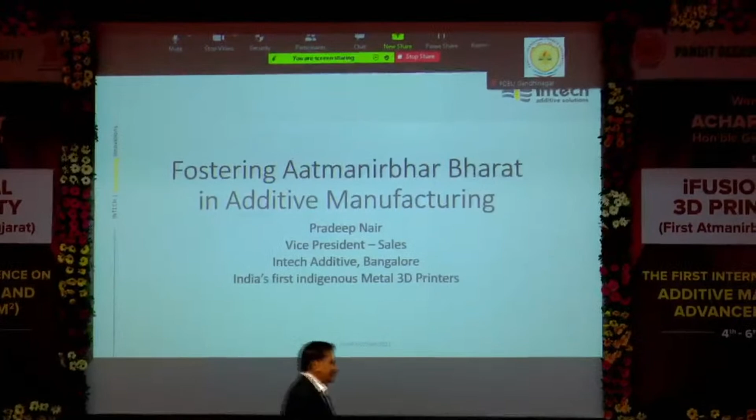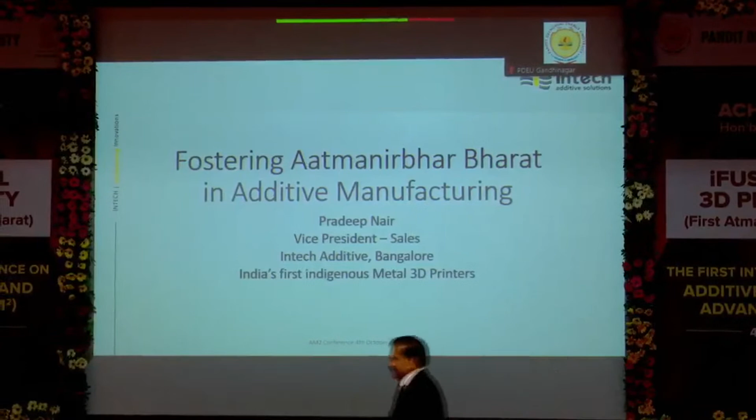Good afternoon, and welcome to the post-lunch session. Normally this session is what we call the graveyard shift for speakers. You know, after a good lunch, all these look like comfortable beds. So it's my job to try and keep you engaged, and I hope you find this talk interesting. My name is Pradeep Nair, and thanks for the introduction.

Yes, I've been with additive manufacturing for a long time. Initially, it started as a technology that managed thermoplastic materials, and progressively it moved to metals. I spent most of my additive life working for an American company, Stratasys, and then moved to a German company called SLM. More recently, for the last 18 months, being with an Indian company that has designed, developed, and is manufacturing an India-made metal 3D printer has been a revelation for me.

Actually, I was listening to Dr. Satish Reddy, who was pushing Indian industries to make powders and the printers themselves in India. I wish he was here, because I would have told him it's already happening. So it's not in the future, it's right here.

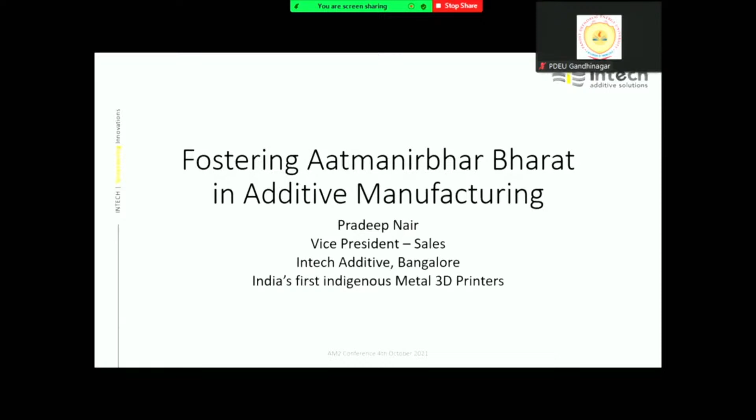I don't want to spend too much time. By the way, I wasn't given too much time by Dr. Sarkar. I think because Navratri is around the corner, he gave me a 50% discount and asked me to reduce my speech by 50%. So off went a lot of slides. So I'm going to skip parts of my presentation, which I'm sure many of you are already aware of or can easily find on the net.

So one of them, for example, why do you need metal AM? Speaker after speaker in the morning told you the importance of metal additive manufacturing. But in a nutshell, it offers unparalleled design freedom compared to machining, which we call subtractive manufacturing. If you can design it, you can print it. Dr. Jha said the very same words. In other words, you don't design for manufacturability, you manufacture for design. That is a key issue with additive.

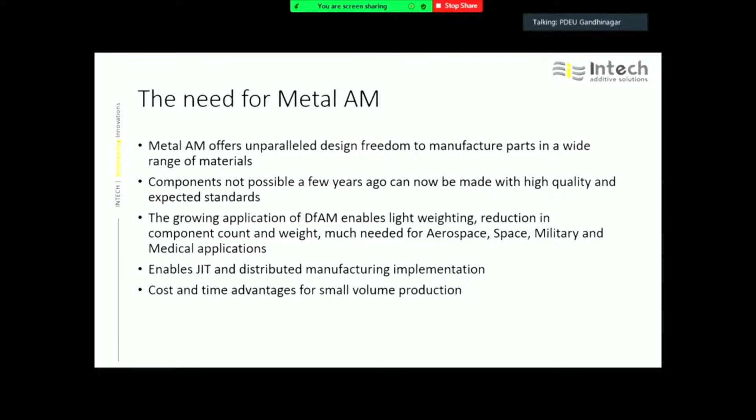Also, the range of materials is increasing. Way back in 2000, when the first machine showed up, you had only an almost primitive steel material. But since then we've progressed a lot. And because of the design freedom, components you could not make some time back are now manufacturable, which means a relatively new subject, DfAM. You all used to design for manufacturing. Now it's design for additive manufacturing, which means right at the concept level you're designing without the constraints of machining. You need to think differently.

So going back to point number 2, components not possible. We have a problem again. Yeah. Now it's the laser pointer's turn not to work.

All right. So since components that were not possible some time back are possible now, you can think differently. That's what DfAM allows you to do. And because additive addresses low volume production, it's not really a technology for millions of components, but when you have low volume and high complexity, additive is fantastic. Which means you can keep digital libraries now instead of keeping thousands and thousands of parts.

I was talking to HAL. One division of HAL has 90,000 parts in spare, and they keep these for decades. They have whole buildings full of spares which may not be used for 20 years, but in the 21st year that spare is required, they have to pull it out. That's a lot of space, time, and money. Now the idea is veering towards, why keep all that? Let's just digitize it and print as and when required. That's spares production on demand.

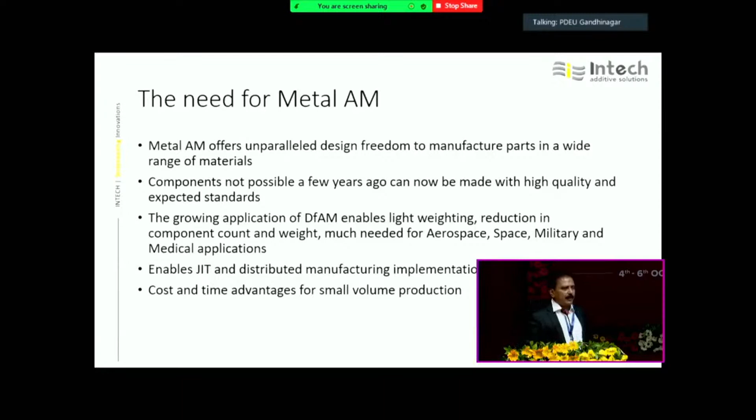And of course, for small volume, the cost and time advantages additive can bring in are huge. So I won't go too much into that, or the application side. I'm sure you can Google a lot of that, because I really want to talk about a subject that was pervading from the morning, Aatmanirbhar Bharat in additive.

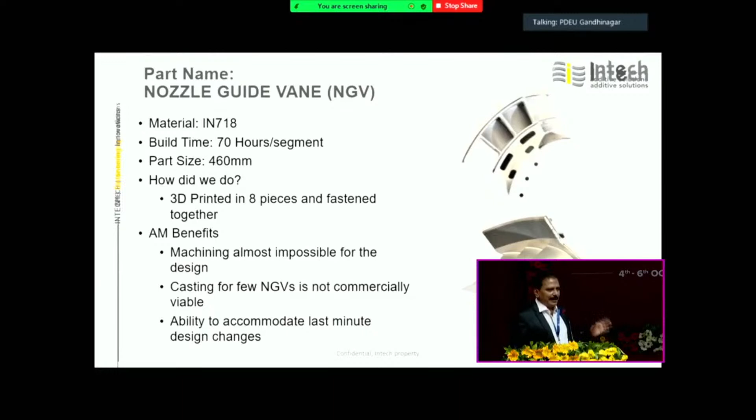Just a few rough examples. This component, as you can see, is virtually unmachinable. No way you can produce that with conventional manufacturing techniques. But since the part was so huge, we couldn't build it in a single print, so we did it in segments. We printed 8 pieces and then fastened them together. The benefit is that this part is not possible to be machined.

And then the requirement, at your early stage of design, you want to test these parts, and you need just a few. So how are you going to tool up or machine just for 3 or 4 of these? Metal additive is a perfect solution for that. And with any design changes, if you're tooled up, your tool is gone - that's probably a few lakhs, thousand, worth of tool just thrown away.

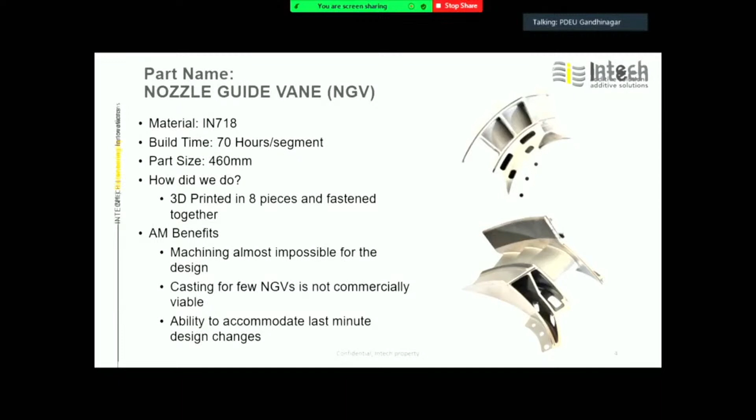What you want to think about when you see this part is that it is all done in a single machine. If you were to subtractively machine this component, how many machines would you need? A whole array of machines, a whole array of processes, a whole array of different skills required to manufacture this component. And that's going to take weeks and weeks of manufacturing.

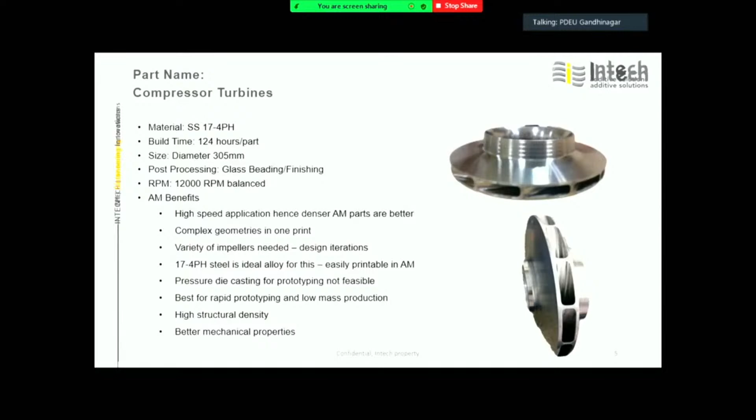Whereas we just print this out in 124 hours, glass bead it, and you almost get this kind of finish - not right out of the machine, but after post-processing. And this component, we ran at 12,000 RPM, which means it could go into the final assembly and actually function.

So this is a critical enabler for not just speed or cost, but also the ability to work with multiple designs, which means you choose the best design in the shortest possible time.

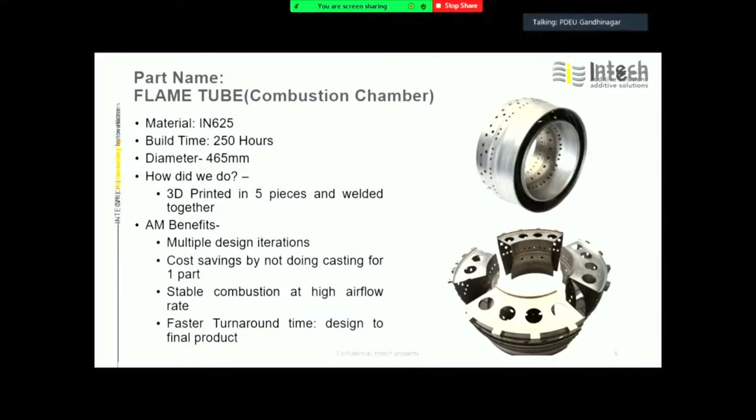No talk on additive is complete without talking about the benefits of conformal cooling. If you Google it, you'll see a lot of examples of how additive is changing tooling applications through conformal cooling. Normally you have a tool with cooling lines running across in straight lines - they do the job, but not very effectively, because you want cooling to happen right at the surface where the plastic or metal meets the mold, so cooling is right at the face, allowing a higher ejection rate of parts.

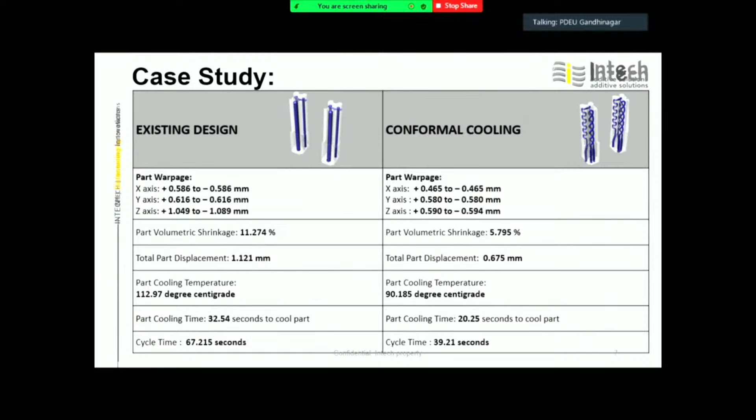Since additive is adding material, not subtracting, it allows you to put the cooling vents right at the face. Look at the cooling channels here - this is the existing design. See the new design where the cooling channels are right up to the face, right at the skin of the metal, which means cycle time dropped almost 40%. In other words, just by doing this, production increased by 40%. That's a big benefit.

The difference is that previously you would get 4 or 5 sizes made by Zimmer or Stryker Medical. If you wanted a knee surgery, a kneecap would be bought from them. You had 5 standard sizes, and you prayed to God and implanted one, hoping it is your size. If it doesn't fit, over time you'll develop some aches, and then you probably go for the next size. It's a process.

Whereas additively done, we're scanning your original bone or cap and printing one exactly in titanium, so that once implanted, it's good - it's good for life.

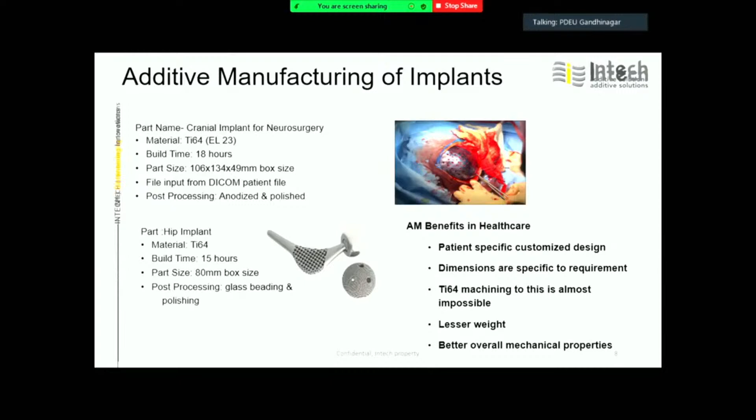So this is really changing the way implants are being done. I'm glad to say we have many examples of this happening within India, including implanting a vertebral bone for a 34-year-old woman who was facing life as a vegetable. We 3D printed a bone for a vertebral disc, and she's back to normalcy.

Not surprising, because in the early days, frankly speaking, when I joined additive in 1996, around 2000 somebody asked me, do you think you'll be able to print metals? For me, it was alchemy, honestly speaking. I would say no, I don't see metals happening. This is one thing I'm very happy to eat my words on. Metals are happening right now.

So as you watch the growth, you start seeing a sudden spurt, especially over the last 4 to 5 years. That's because more powerful lasers are coming. Those days we used to work with 100-watt lasers. Before that it was a 20-watt CO2 laser, YAG lasers. So we moved to solid-state lasers. Now it's ytterbium fiber lasers that work at 400 watts.

In fact, the iFUSION SF1 downstairs is a 500-watt laser. So that means the laser is powerful, it allows you to melt increased number of materials, which means new applications are emerging. And thanks to multi-laser, material costs are coming down. Going back to Dr. Satish Reddy's question about powders being made in India, it's already happening.

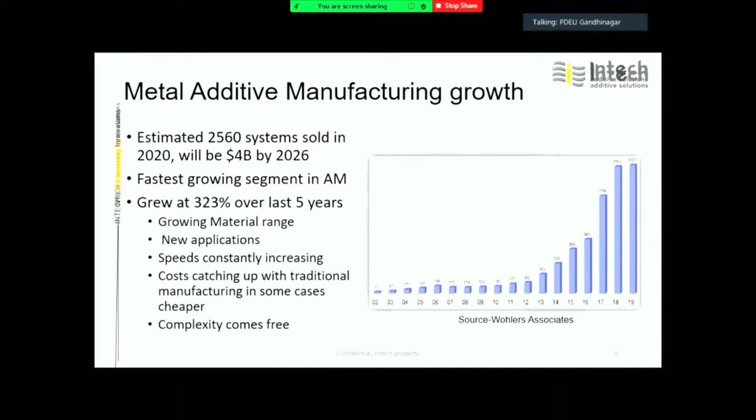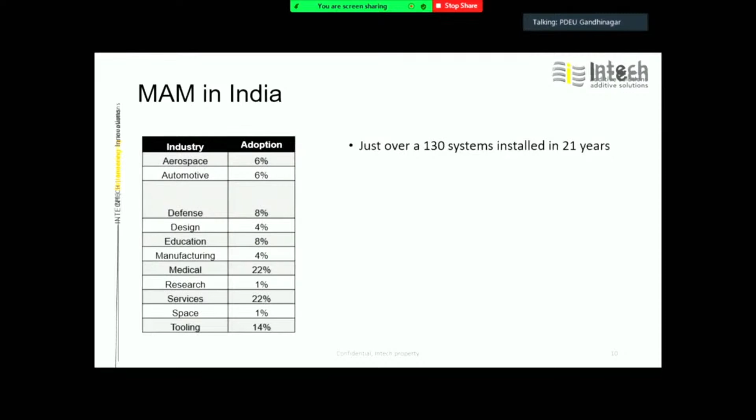So there you go, sir. MAM stands for Metal Additive Manufacturing in this case. Looking at India's situation, the first machine was installed in India in the year 2000 at CMTI Bangalore. Since then, in 21 years or so, we have just got 130 machines installed. Not a great number—that's roughly about 6 machines a year.

So how do we compare? China probably installs about 20 a month while we install 6 a year. I think we shouldn't compare at all—we are really behind. But the good part is that approximately 70% of them were sold in the last 5 years, which means the importance of metal additive manufacturing is now being felt.

And it's only going to go up because of a few factors. These are statistics. When you look at it, medical tooling—medical is a loosely held term here because this is mostly dental implants, crowns, caps. Trust me, in about 24 months down the line, all your crowns and caps will never be casted, the traditional approach will not be there. They'll all be 3D printed.

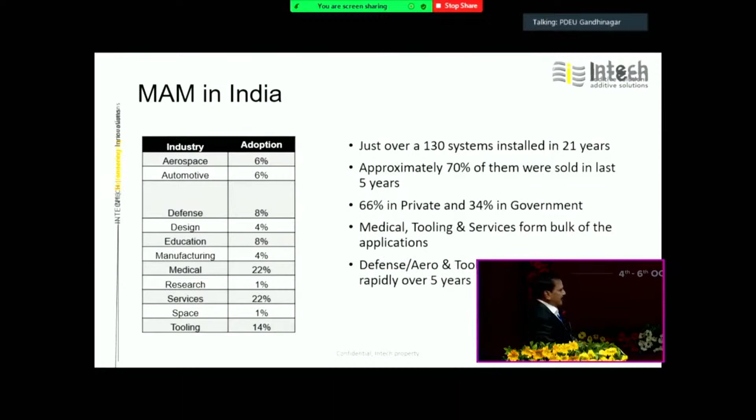But this is key: as you all know, the Prime Minister has moved 110 items away from the import list, and now they have to be manufactured within India. I believe that will spur additive manufacturing in a big way.

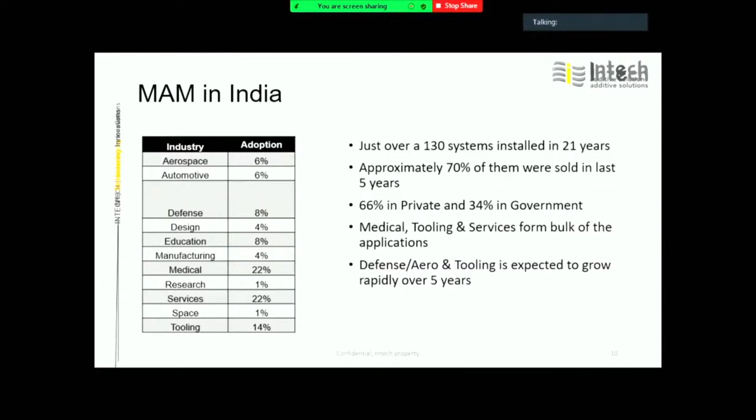Okay, again—it's a little slow to respond. So when you go back on this issue, we see that very few machines are installed. So what's happening to us? Excuse me, next slide please.

Yep, so a few points to ponder between us. We missed out on the third industrial revolution. Dr. Manohar mentioned that the university is built around Industry 4.0. This is a critical area we want to get into, and I strongly believe additive, especially metal additive, is a key component of Industry 4.0.

Some of the things InTech is developing are very much aimed at this particular manufacturing philosophy, lights-out manufacturing. COVID taught us that a pandemic shuts down everything—industries, gone. So how do we start manufacturing despite COVID?

So we're looking at technologies that will enable that, where you have automatic pre-processing, manufacturing, automatic post-processing, and parts come out, and you could control this whole system using your iPhone or Android. That's Industry 4.0 enabling that.

But we missed the third industrial revolution. Even though we are the world's number 2 in cell phone manufacturing, how much of it is our own? We're just assembling, right? How much are we designing and manufacturing? Very little.

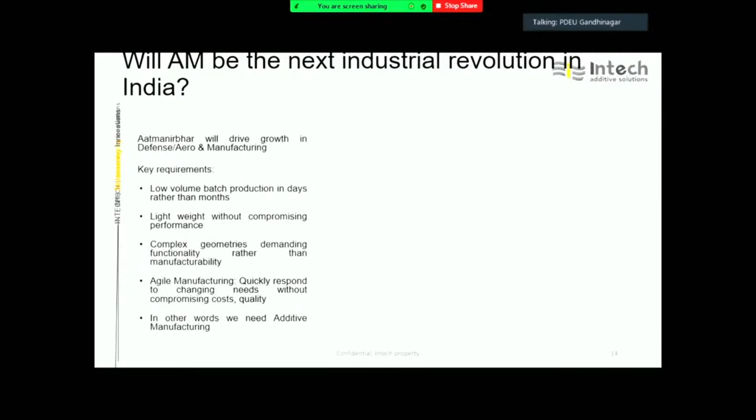So additive meets this requirement very well. I've talked about this low volume production, lightweighting, etc. These are key to the next generation of manufacturing.

But look at what we're doing, how much we're investing in this. If you look at Asia alone and look at the additive market size, we invest only about 3 to 5% of all machines installed in Asia is in India.

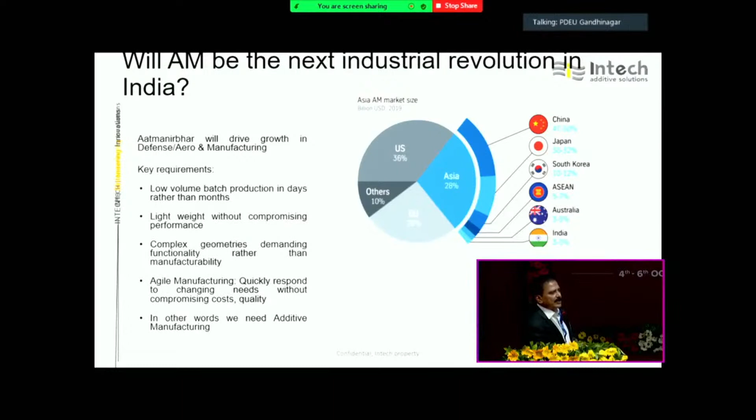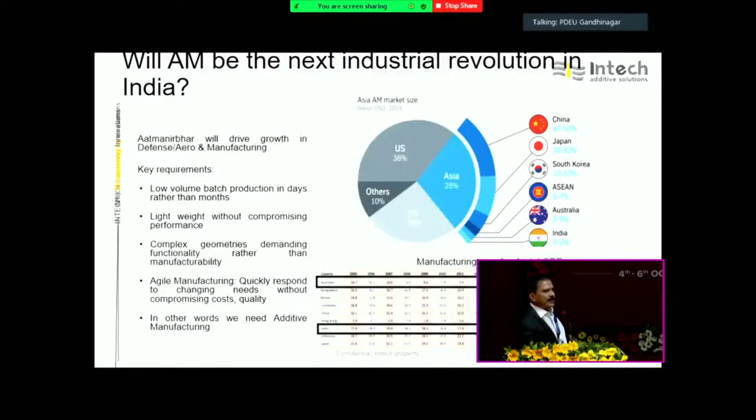Now that compares, when you look at manufacturing as a percent of GDP - Australia probably has, for every one manufacturing organization in Australia, we have 100 in India. That's the kind of ratio. But you look at the number of machines they have bought and we have bought, and look at the GDPs, manufacturing as a percentage of GDP.

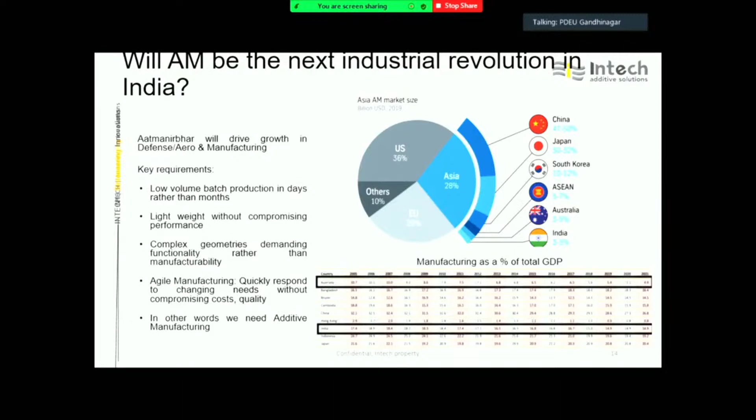While we are ahead of Australia, look how little we are investing. So why are we doing this is a good question. So what is inhibiting our investments?

Let's face it, we are traditionally a conservative country, right? We don't rush to invest in new technology. We wait, we watch, and we generally come in much later. The world has invested and gone ahead, and then we slowly start going towards that direction. But then I'm not convinced that's the only reason. And I strongly believe again that there's a lot of interest in metal 3D printers.

But here's the problem. I think this was mentioned in the morning session. All metal 3D printers were imported so far. So a small machine, the cheapest machine with hardly any good specifications, was minimum 2 crores. Mid-range was 6 to 7 crores, and bigger machines from 9 to 15 crores. Really, how many companies can afford that in India?

Really. And the story doesn't end there. It's subject to duties, transportation, insurance, put another 25%, add more for site preparation. So it's a pretty expensive proposition. And when you looked at the break-even or return on investment, it was very, very challenging.

Our defense has the money to invest in 3D printers. But here's the challenge. If you were to import a machine from Germany or, let's say, USA, you had to sign an end-use agreement, which restricted you. If it's US, you have the ITAR, or if it's Germany, you have the BAFA, which restricts what you can use it for. For example, Professor Ganguly wants to use it for nuclear fuel applications. It's a no-no. You cannot use it.

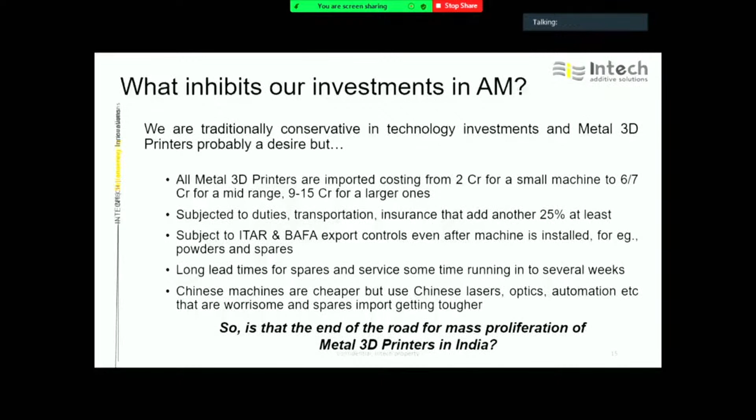Next slide, please. Okay. All right.

Intech actually started our journey as a 3D printing services company. We printed parts for other organizations like HAL. Somewhere in 2017, we were struggling. It's not as simple as making a metal powder and running it on the hardware. There are 248 parameters in a machine, and you have to program all 248 parameters to successfully run the powder. That's a challenge. So every time we wanted a new powder, we had to go back to EOS or SLM of Germany, pay them 30,000, 50,000 euros, and wait 6 or 8 months before we could get a parameter.

So we decided to automate that. We started writing our own software called AMOptoMet, then we decided to make our own print control software. While we were doing that, AMOptoMet and AMBuilder, we decided, why not get into designing? When I say we, Sridhar Balaram, my CEO, decided to invest in developing an Indian printer. Now, I would say that was quite gutsy, because back in 2017, nobody would imagine an Indian company was going to come up with that. The technology itself is actually quite complex, to tell you the truth. So we didn't think he'd invest in that, but he did.

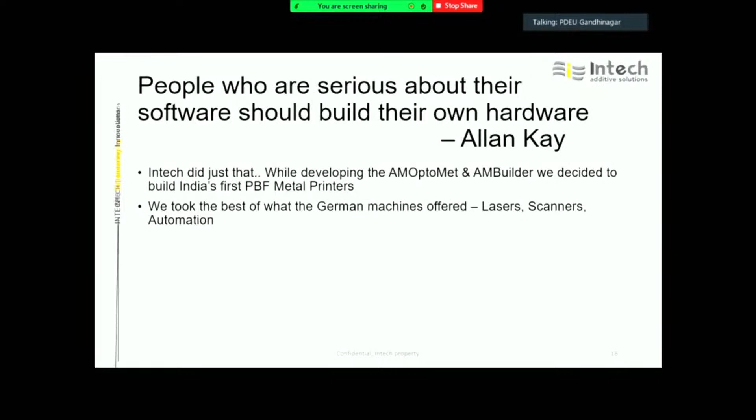So when we decided to build the machine, one thing we decided we will not compromise on. We took the best of the lasers, best of the scanners and automation. That's still German, but the balance of the machine, about 72%, or 2,300 components in that machine downstairs, the SF1, whenever you get to visit it, all of them are machined with high precision in our facility in Bangalore.

While we were designing, we filed our own IPs, patents. So the machine we created is 100% indigenously developed with no patent violation. So that's something exciting. And the good part is, around this time, I think most of you probably know DMG Mori, global giant in manufacturing.

DMG Mori saw Intech and actually invested in Intech. So they hold 30% of Intech. But strictly hands-off: we design, we manufacture, and they don't interfere. But it's good to know that a German giant thinks an Indian technology company is well worth investing into. And the result is that

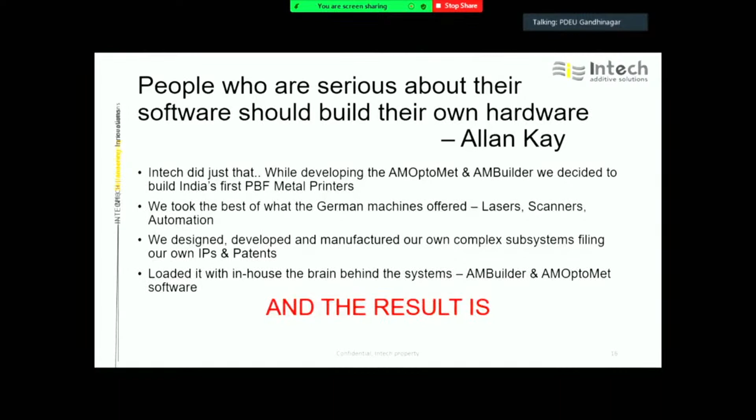we made India's first metal 3D printers, the iFUSION SF1, which we announced last year. And towards February this year, February 17th to be precise, we introduced the LF series. The LF series is a large format machine, which is 450 millimeters. It's a giant part, actually. So we introduced these two machines.

We are well on our way to make, not many ladies here, but exciting news: you can actually walk into a showroom and print your own jewelry. So we should be launching a machine in January that actually prints in gold. Right? That's pretty exciting. So gold, platinum, and probably brass. So we have a machine coming up called Precious that will do this.

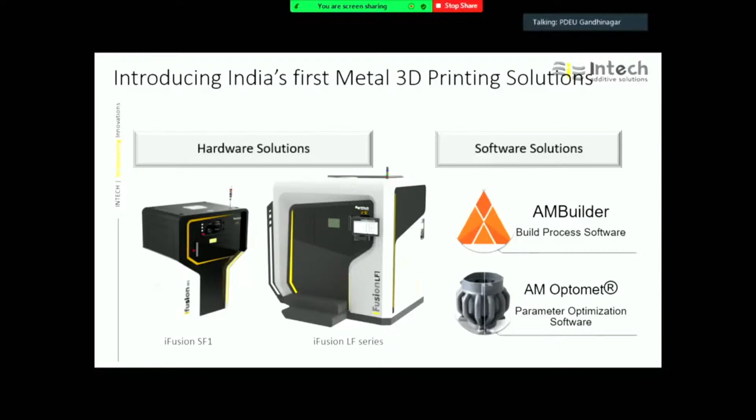We also have a mid-format machine coming up. We also have software solutions like AM Builder and AM Optomet. This is unique, only one of its kind in the world. So something we are very proud of. So we truly have a homegrown solution in metals. But I'm going to skip this. If you want to see the machine, I think you'll have an opportunity to see it downstairs.

Now, this is something I want to quickly talk about. In a couple of slides, I'll be out. Our core area is to continue designing machines and continue writing the core software to enable our users to exploit the hardware in its best possible form, right? But there's a lot more to this. There's a lot of technology that goes into pre-processing and post-processing and even during build that we need, that would give us a more complete ecosystem of metal additive manufacturing.

And truly, I at heart believe that Intech will be an MNC in 6 months. We'll open our offices in Europe, in Germany, and in Singapore or Korea next year, and most probably towards the end of next year, we'll have our first US office. So again, I wish Dr. Satish Reddy was here. He would be excited to hear that we got our first international order already. So we are truly getting to be an MNC.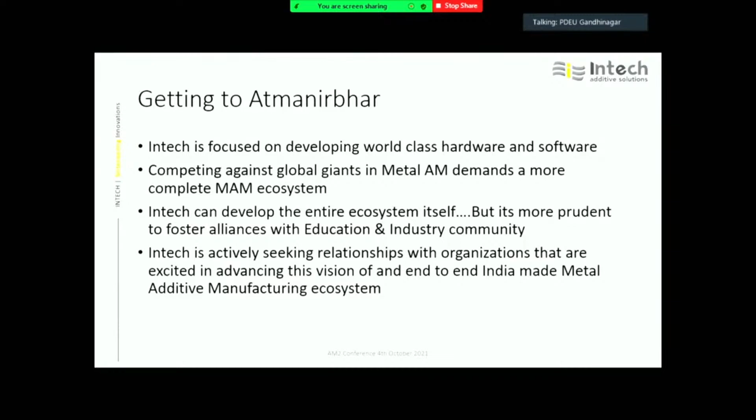But then we do have a big challenge. We have additive giants who have been in this field for a long period, and we as a young Indian startup are going to clash with the titans. We realized one thing: they're all focused narrowly on their hardware and software, and all the subsystems are third party. So we decided that's going to be our strength. Of course, we are also focusing on consultancy and DFAM services, which we believe will be a key element in taking a customer from subtractive to additive. But beyond that, we are now focusing on providing our customers a truly complete ecosystem.

I think Dr. Srivastava from Nuclear Fuel Complex was talking about that. You do near net shapes, and then you have to go through a lot of extensive machining. But CM247 is not ideal for machining. So we made the powder to run on these machines, a first globally. There is nobody else in the world who has succeeded in making this component, and it is a collaboration between HAL and us. Similarly, we are working with quite a few, IIT Jammu, PDEU, CMET, IISc, in different spheres.

We have now opened discussions to work with the industry. But there's a lot more that we want to develop. For example, we still import lasers. Is there anybody out here who would want to design lasers? We are very interested. We want to support that effort and work with them in developing our own laser scan systems. We want to develop melt-pool quality monitoring tools, powder management systems, sieving systems, filtering systems. There's a whole host of things.

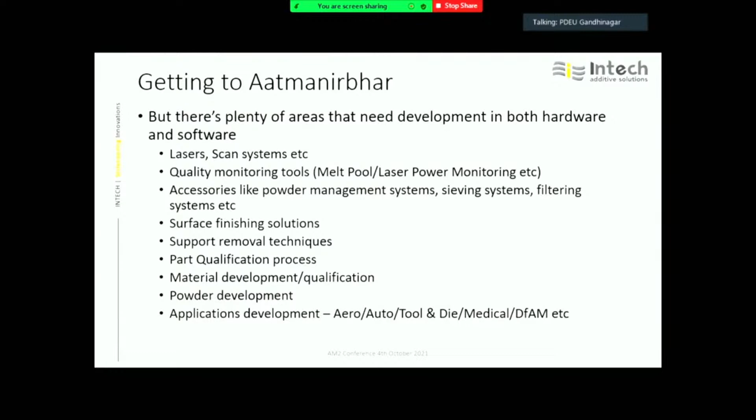So if this sparked any interest in any of you, I'd really like to invite you all to join our journey in creating this ecosystem. If you have any ideas for projects that you want to work with us on, please contact us. Do send us a mail. We want to talk to you. We evaluate your project, we want to talk to you and see if we can have a relationship that is mutually beneficial.

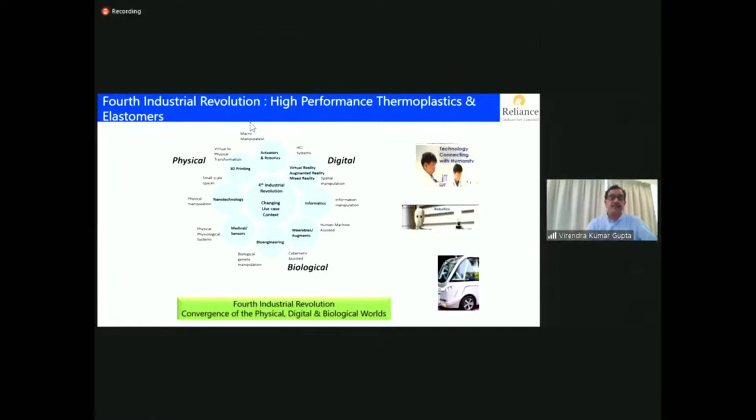Now, if we look at the physical part of the fourth industrial revolution, 3D printing technology is one of the most critical technologies to bring new innovations or new growth in the sectors relevant to society. Now, 3D printing, as you heard in the morning, is going to be the next industrial revolution.

And what it does is that the information captured digitally, through the material choice, gets converted into the product. And therefore, additive manufacturing is going to be critical for niche applications, not high volume applications, but low volume, yet at the same time very critical. And this is the best example of digital information converting into products through material choice.

And our interest is more in the materials, which is part of my discussion today: how Reliance is pursuing efforts in developing materials, particularly thermoplastic materials and elastomers, which are critical for 3D printing. And as I heard, in India, in Atmanirbhar Bharat, we should also have technologies for most of the materials to bring down the cost and also not become dependent on others.

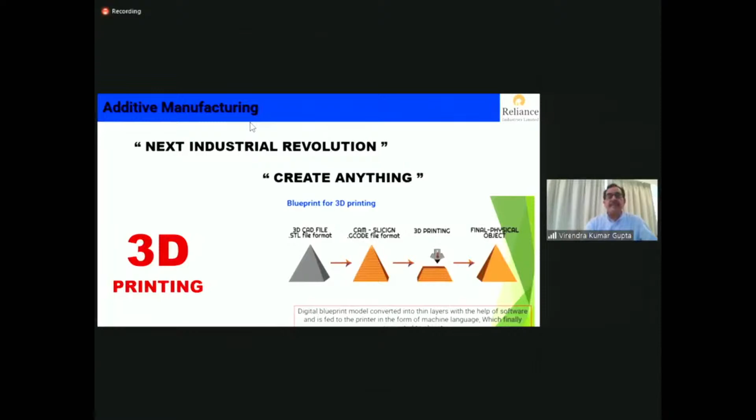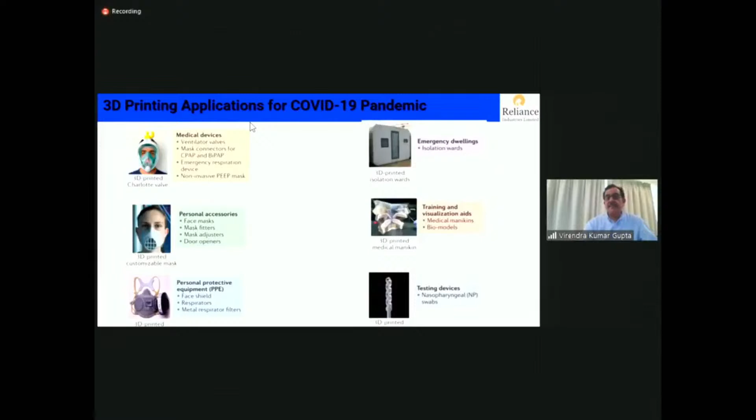3D printing applications in COVID time, I think, were well demonstrated worldwide. Reliance also worked on some medical devices based on 3D printing, and we have successfully developed that. And this COVID time has really demonstrated how, in a short period of time, a technology such as 3D printing can be useful and make a difference for societal needs.

In addition to that, there are many areas where 3D printing has unique applications, ranging from the medical sector to buildings. Today, 3D printing is also getting a lot of attention as a technology for creating sustainable buildings in a much quicker time, in addition to the medical sectors and others.

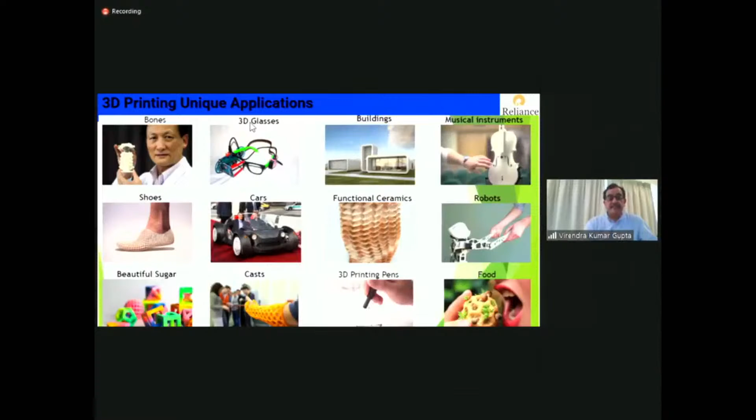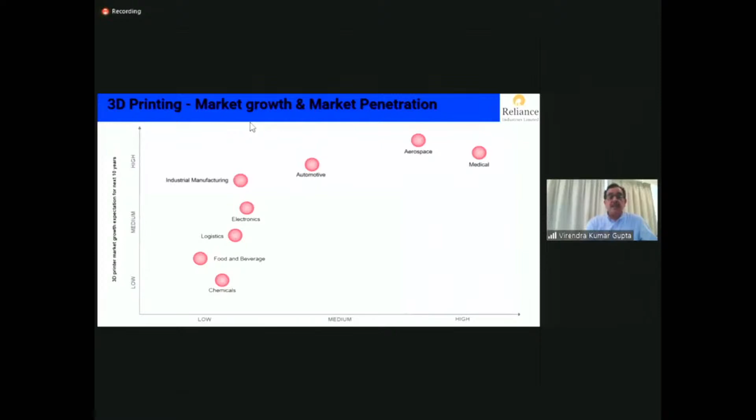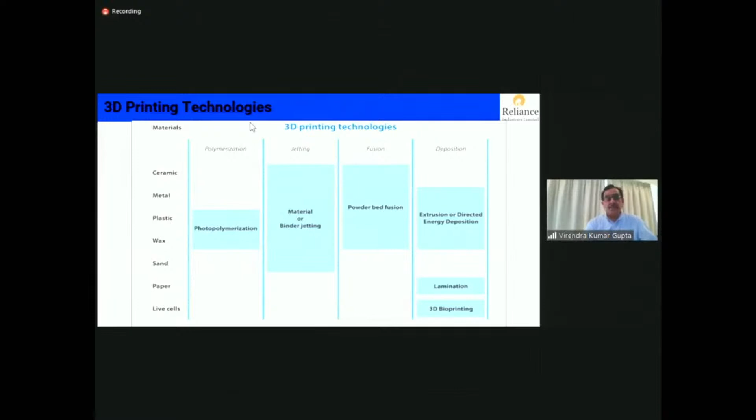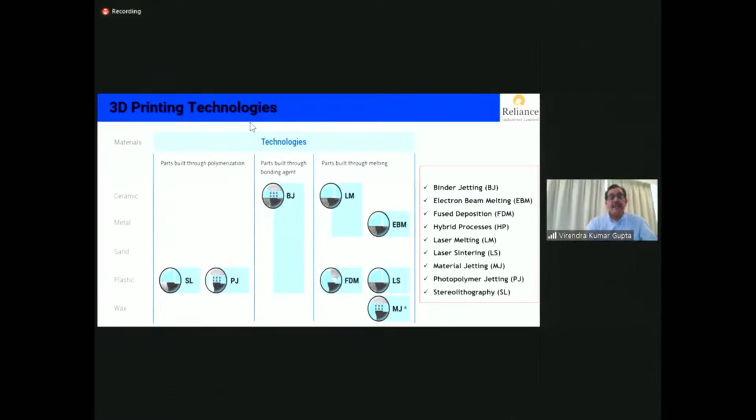If you look at the other part, plastic parts built through polymerization and plastic parts built through melting, where FDM and LS technologies also exist. These two slides indicate that in India, if we develop the right kind of thermoplastic materials, there are good opportunities for increasing the growth of these materials using additive manufacturing. And that's why it is important that we have our own material technology for this processing.

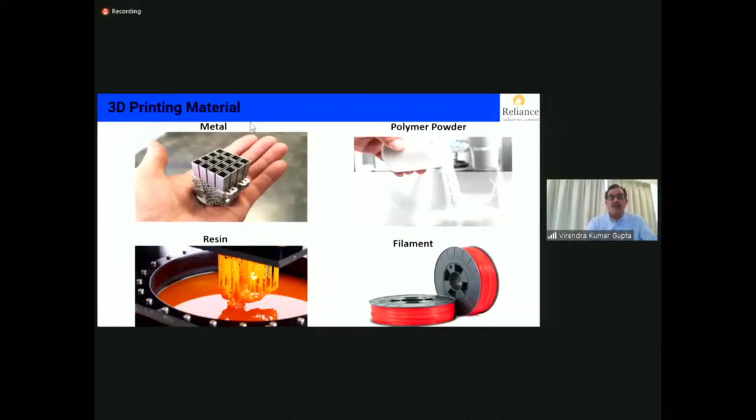And here I try to show that in the morning you heard more on the metal side, but our interest is more in the resin, polymer powder, or filament, which are critical for many end-use applications. Furthermore, if you look at the thermoplastic material pyramid, that's why I said thermoplastic materials are a versatile material of choice, and the most important development we need to do is fine tuning of the molecular properties of these materials, physical, chemical, or other characteristics, so that they can be tuned to 3D printing applications.

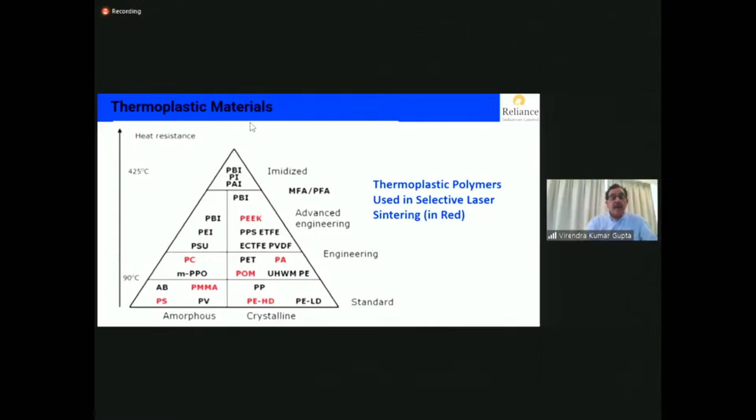Now, Reliance in the past two decades has been very active in developing indigenous technology for polyolefin materials. We have been very successful in developing polypropylene technology, the first time in India, and are now commercially producing polypropylene in Reliance. We have a large number of products which have come out from this technology, developed in Reliance from bench scale to commercial scale over the last two decades with different generations of product. We have extended that to polyethylene in addition to polypropylene.

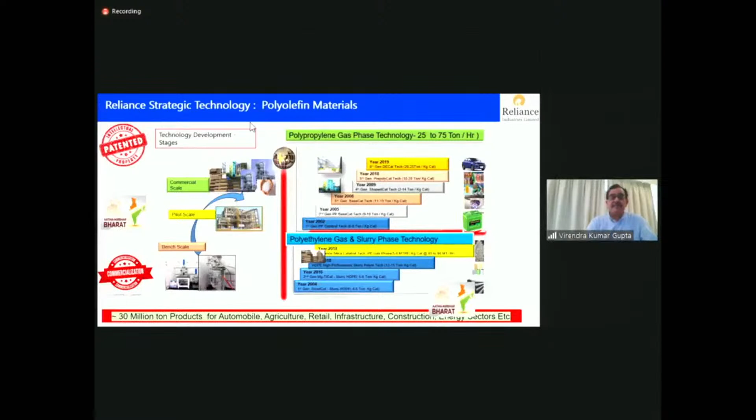These successful developments have already been demonstrated for different products, for example in the agriculture sector, like the raffia grade. Here I want to emphasize one example: if we have our own materials technology, the molecular level structures can be tuned in a manner which is critical for processing. In raffia grade, when we developed our own indigenous technology, we tried to see how to increase the line speed of the processing unit. We observed a very good correlation between molecular weight distribution and line speed, and therefore we could alter the molecular weight distribution of the raffia grade so that we get the highest line speed in the processing machine.

This is one example showing that when you have your own technology, a lot of improvement and designing of material properties can be done to suit different applications. That's why we went into impact copolymer, biaxially oriented polypropylene, and random copolymer. And today, all sectors are using Reliance polypropylene products based on indigenous technology.

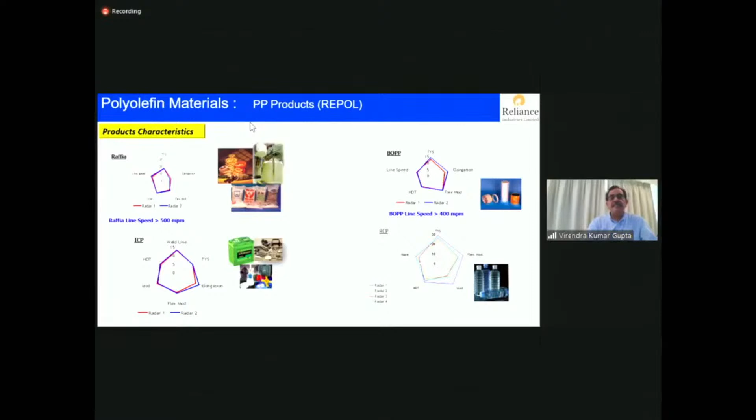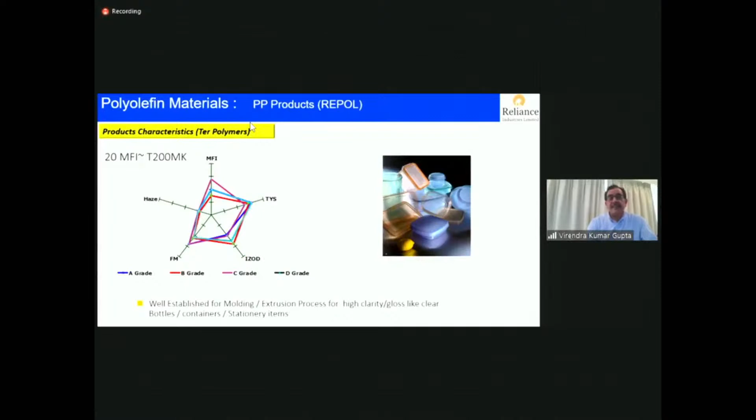Even the random copolymers, which bring the transparency better than the other grade of material, we could develop, because in 3D printing, in some of the applications, the transparency is also very, very critical. And now, with this knowledge of improving the transparency, we can say that we can develop polypropylene materials for 3D printing. And that's why in the last few years, after development of all these grades for different sectors, we also initiated work on creating reactor-made polypropylene.

There are many products available in the market which are based on composites or others. But we thought, in order to make a more effective, low-cost solution for 3D printing, we noted that the microstructures of polypropylene can be fine-tuned in a manner that will allow polypropylene to be used as a suitable material for 3D printing.

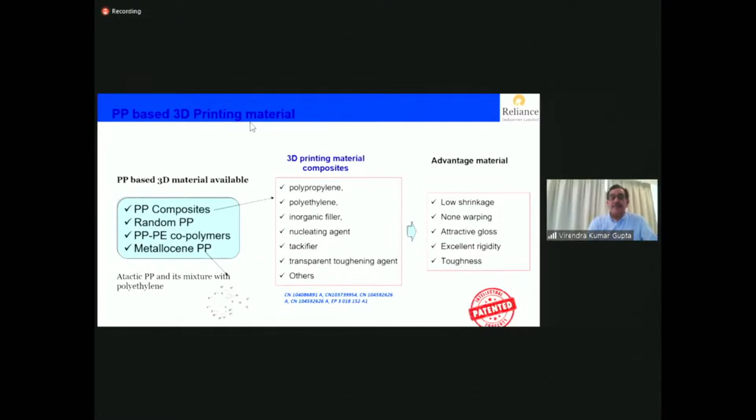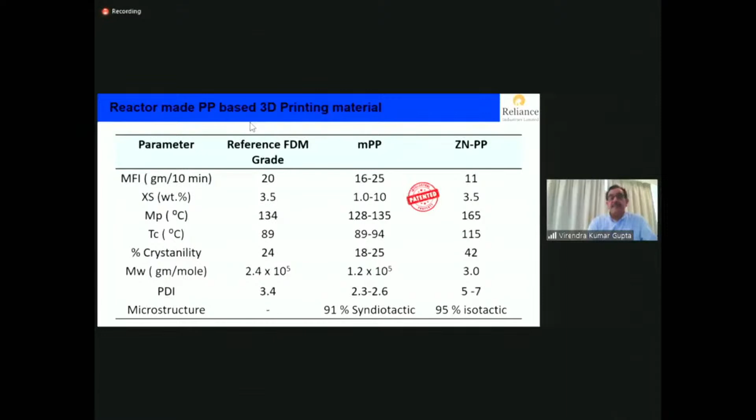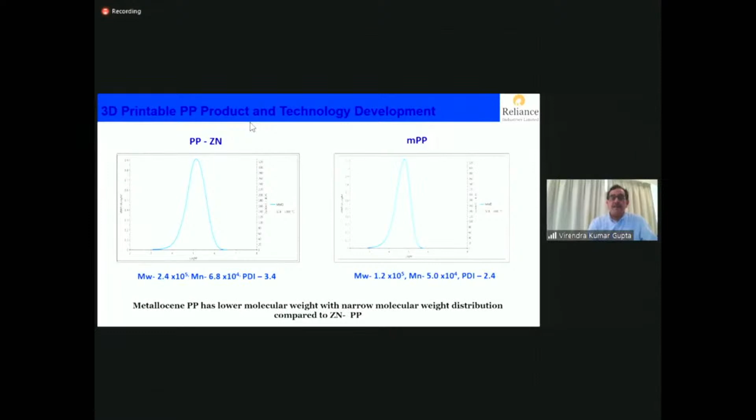And we are very successful in developing a few grades of polypropylene with the right kind of balance of flow properties, stereoregularity, melting characteristics, crystallinity, and molecular weight. And in those products we have seen that, in addition to the microstructure, the molecular weight distribution also plays a critical role for use in the filament application.

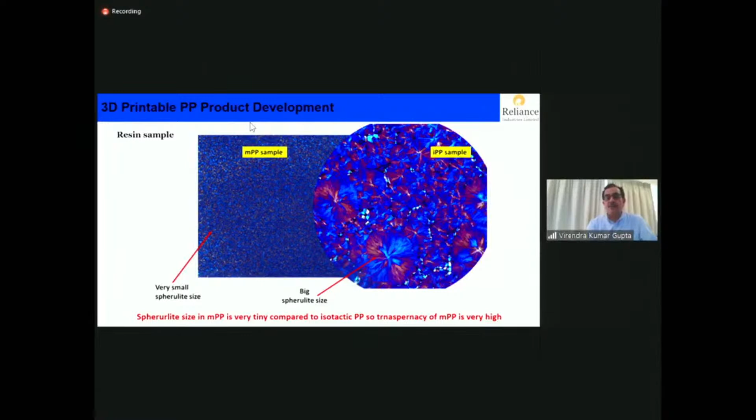Further, as I mentioned, transparency also plays a critical role in development of applications which are required for niche products. We are able to develop the polypropylene product with very small spherulite size. And this spherulite size allows the polypropylene to be more transparent as compared to polypropylene with a bigger spherulite size. And we could easily demonstrate that.

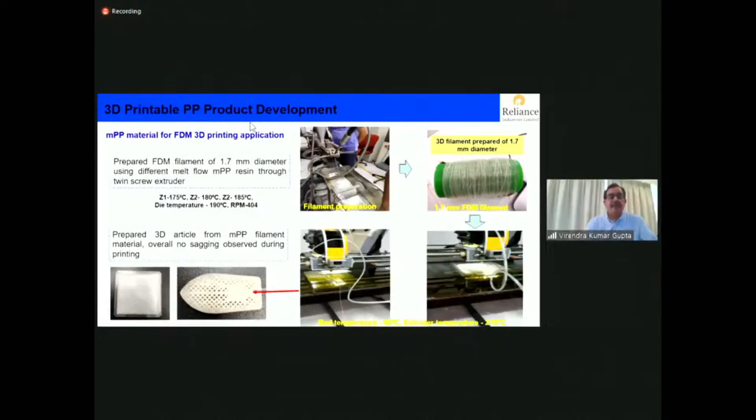We have used this polypropylene grade first in our FDM application, filament application, where we are able to produce a suitable filament which is useful for 3D, and we are also able to make some prototypes as indicated over there. So this is a first prototype product which we have demonstrated using Reliance patented polypropylene products based on reactor technology. Further, in the same way, we have also developed polypropylene powders which are useful for laser-based 3D printing. And those developments are also under progress.

The next example which I want to cover is that today bioplastic is becoming a more important part of thermoplastics. We are working on developing our own technology for bioplastic, and our success with indigenous technology in polyolefins allowed us to move in the direction of bioplastic material suitable for 3D printed products. We are able to produce today one grade of bioplastic, which is at a very early stage of development, but we are able to make a filament of bioplastic, which we are then able, using different designs, to convert into the product.

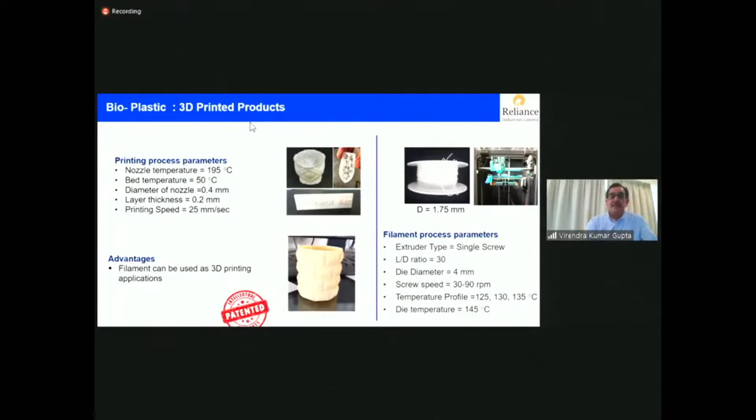And in my opinion, this is an area where bioplastic-based thermoplastic elastomers or other materials will be quite a good solution to many of the challenges which need to be solved for problems facing society. So in summary, what I want to say is that in the fourth industrial revolution, 3D printing or additive manufacturing is going to play a very important role. And this is the right time when we all, the scientists, engineers, industries, academics, should join together to ensure fast growth in this area, because we could not catch up with the third industrial revolution, but the fourth industrial revolution is the right time when we all should come together.

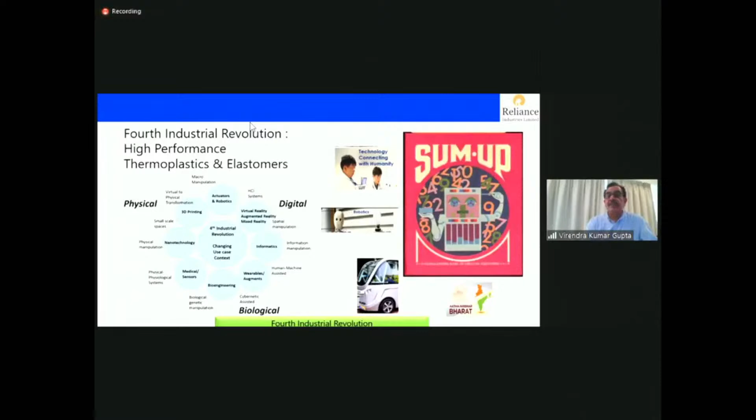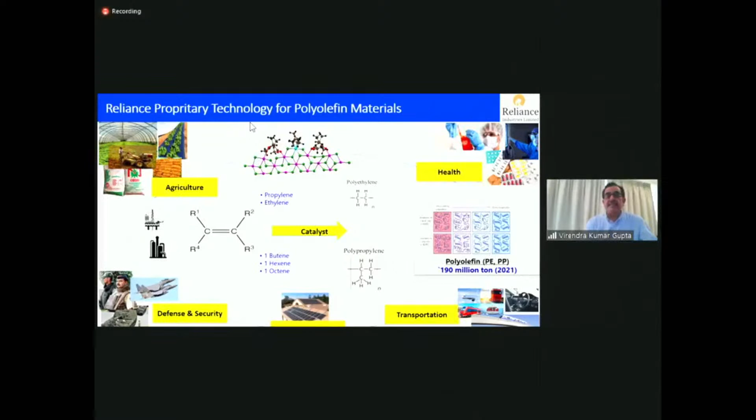And in this fourth industrial revolution, material will be the most important factor, and any country should have that technology. And Reliance has been able to demonstrate, based on the past in polyolefins, indigenous technology development for different sectors: agriculture, defense, transportation, health, and also moving toward solar energy. And in advanced polyolefin materials, as I just mentioned, we have succeeded in developing specialty polyolefins for 3D printing applications. For filament, we have developed the grade. We are also working on polyolefin powders, which are essential for laser 3D printing applications.

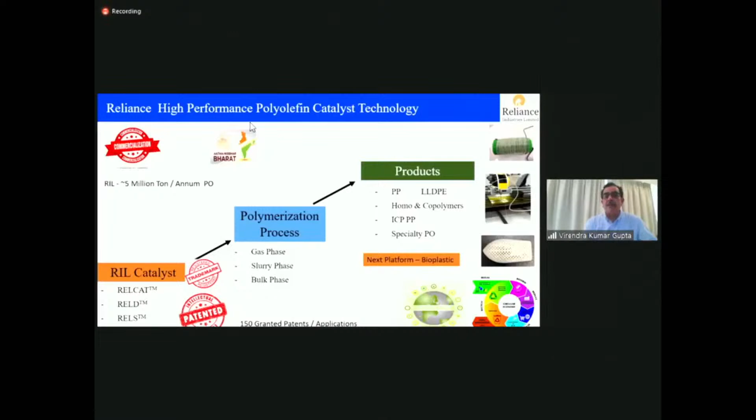And the next platform which we are creating is a bioplastic platform, where it will be essential to design the product with a controlled life period, keeping circular economy and sustainability aspects in mind, for creating solutions for society. We are looking at what is next. And as I mentioned, in additive manufacturing, three platforms are going to be critical: materials, processing, and products. And synergy among these is very critical for developing indigenous technology, and these kinds of inventions and innovations are going to make a much bigger social impact in coming years.

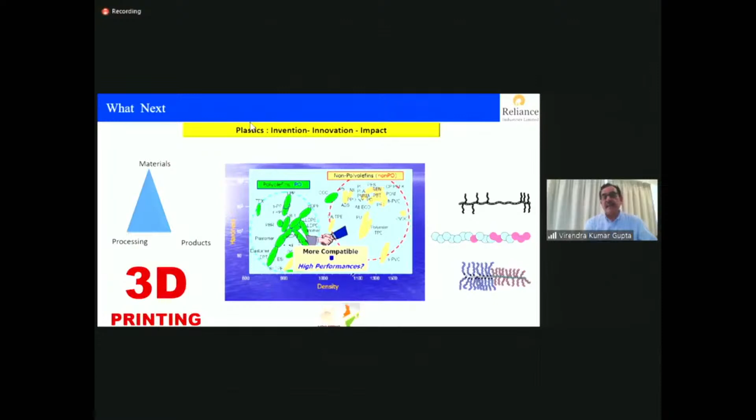Reliance has already demonstrated a few grades of thermoplastic polyolefins for 3D printing applications, but we look forward now to creating new technologies for 3D printing materials based on plastic, combining polyolefins as well as non-polyolefin materials. And this kind of technology and material development will take us to the next level of leadership in India for technology.